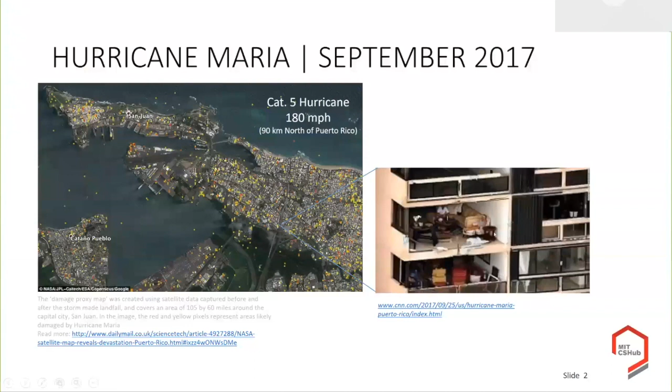To start with, we have seen it all coming over and over again. Hurricane Maria, September 2017, Category 5 hurricane. Puerto Rico has still not recovered from it. You see here a map of damage that occurred in San Juan. The local damage also here. Still, Puerto Rico has not recovered.

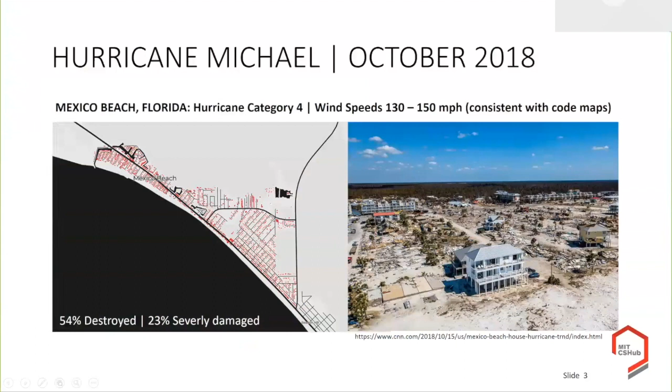You have all seen and heard the story of Hurricane Michael, devastating Mexico Beach, Florida, a hurricane Category 4 with wind speeds of 130 to 150 miles per hour, as predicted by current code maps. Still, despite that fact, 54% of all the buildings have been destroyed, 23% severely damaged, except for one building, as you see here, which apparently had not much damage.

Impact of hurricane damage, wind and floods are huge. Hurricane Harvey alone had an estimated cost of $125 billion, second only to Hurricane Katrina. The top vulnerable states or areas are New York in first place at $2.92 trillion, Florida, Texas, Massachusetts, where I'm talking from, and New Jersey. If we just take 2017, the cumulative cost of the 16 separate billion-dollar weather events that year was $306.2 billion. These are numbers which are unimaginable and cost enormous money to all of us.

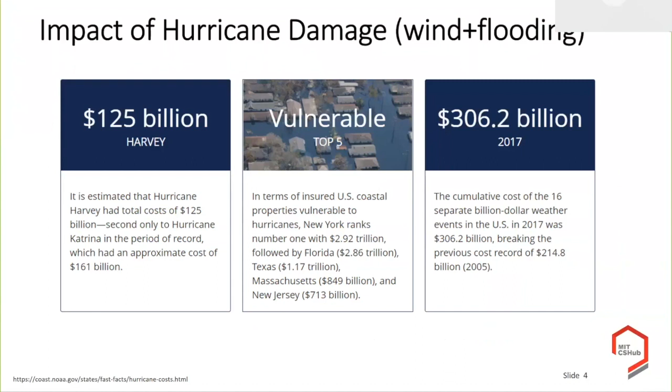So will this get any better? Well, future hurricane damage is expected to increase because of warmer climate, particularly for strong hurricanes, Category 4 and 5. Maybe the wind maps will need to be adapted for it, but it is clear that we need to do something now in order to address this issue.

And have we not seen enough so far to realize that we need to do something? Let me be clear about one thing from the onset: this is not about whether you believe in climate change or not. It's not a matter of belief. This is about whether you do something now or not. And that is a key point I would like to make. This is not about believing in climate change. This is about doing something.

The second point is more professional. I'm a structural engineer by training, and I'm realizing that classical engineering approaches somehow fail to predict this damage, despite the fact that we have the right hurricane speed maps for which buildings should be designed.

So my conjecture here is that classical engineering approaches, which are based on what's called mean field theories, from city scale to structural resilience scale, fail to capture the key nature of hazard events. I will dive into this a little bit more during the next 45 minutes.

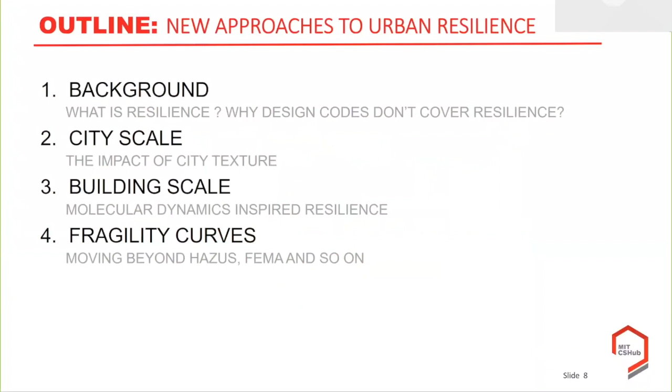I will start briefly with a background. What is actually resilience and why design codes don't cover resilience currently, at least in terms of impact. I then start at the city scale and look at the impact of city texture before going to the building scale and talking about mobility curves, fragility curves, which are used in order to define, assess, and eventually improve resilience of building stock in communities.

So what is resilience? Well, resilience is very often misunderstood as robustness. A structure which is sufficiently robust should withstand whatever type of storm comes in its way. That may be true, but that's not what resilience is about. Resilience actually is shown here on the left side of the slide in this figure. A system is given a certain functionality. At an extreme event, there's a drop of functionality and then a recovery time.

So resilience actually is the combination of robustness, so the drop. If the structure is completely destroyed, of course, you have a rebuilding that needs to take place. But what really makes a community resilient is the rapidity of bringing a system after such an event back to its initial performance.

And in the context of urban resilience, this involves a multi-scale approach. We need to look at the loads at the city scale, and here I'm going to address the role of city texture on building pressure particularly. We need to consider the fragility curves for different building types and loads, so going beyond what is currently in the books in design codes or other types of approaches, and highlight the value of materials like concrete or other strong materials that are able to contribute to resilience.

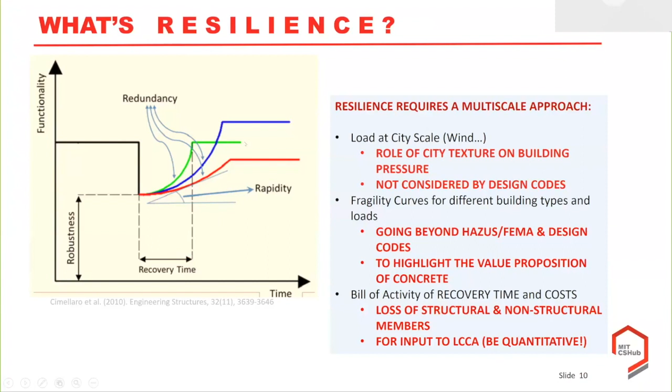Finally, resilience in the end needs to be brought in the context of what is the return on investment, by which I mean we need to bring together the failure at a certain time with the recovery time, which relates to the bill of activity in order to bring a system back to its initial performance. So be quantitative from a life cycle cost analysis point of view.

In fact, I won't show many equations, and don't be scared about this triple convolution integral here. All it tells us is what the key players are that make a community resilient or not from an assessment point of view. On the one side there's the hazard itself. The hazard has a certain uncertainty. How often does it occur? What is the likelihood of it occurring? That is an important issue. But one aspect which has always been forgotten is that this is also city texture dependent, and I'm going to show you this in a little while.

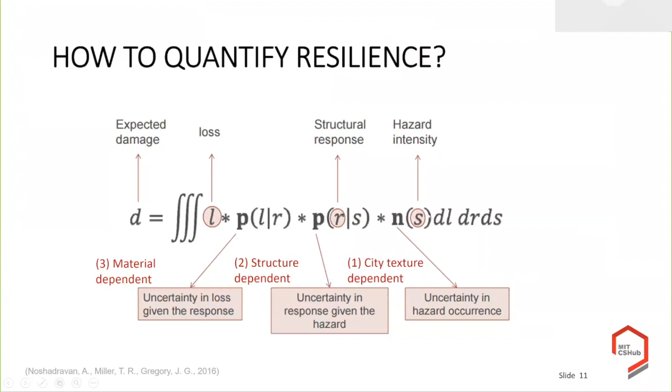The second one is, once we have a given hazard, there is a certain uncertainty, a probability actually, of the response of a structure. How will a structure respond to it? Not on average, but when something breaks, it relates to fluctuations, because structures are designed on average to withstand something. So it's a structural response. And finally, there is the uncertainty or probability related to the loss given this response, which is material dependent. Those three parts need to be addressed and motivate this multi-scale approach, which I would like to show you.

So my first point is the impact of city texture on resilience. The key message I want you to take away here is that urban geometry magnifies or reduces wind loads. City texture densities are already well known to impact the pressure loads. If you look at the different categories of hurricanes that may occur, if you had just a single building, then we could design all buildings as if they were standing all alone. However, there are interactions between buildings and magnifications of speeds and thus pressure due to city texture.

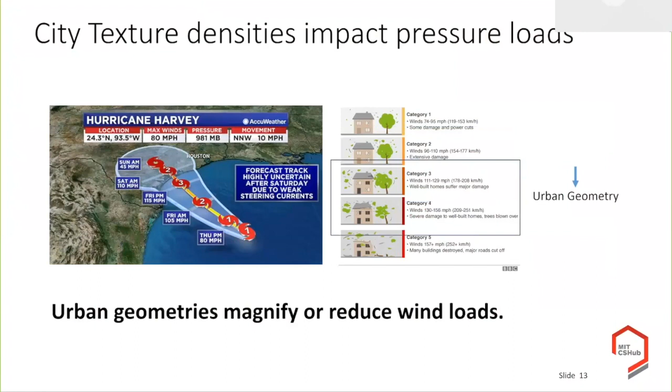To illustrate this, you see particularly that as you go to higher wind speeds, urban geometry comes into play. Now, what is the link between the pressure for which we design a building, the wind loads, and the wind speed maps, which are well established and quite accurate in terms of occurrence? What's the link in between? Well, we have the wind speed from a map which is in design codes or design guidelines.

We have a density here of the air, and then we have this famous drag coefficient CD here for buildings and building types. There's also a surface exposure coefficient, whether you're on the front, on the back, etc. But in fact, what engineers use in design is not directly the wind speed, but the pressure, in order to design a structure for a certain load induced by some wind.

So given the observable damage each hurricane season, what's wrong then in our approach that we are not able to capture these extreme pressures which lead to this strong destruction which we see every hurricane season? So is it the maximum wind speed? Well, if you survey the wind speeds of the different hurricanes, they are well in the range of values which are predicted for a long time. So the wind speeds per se are not the cause that we have a wrong estimate of the pressures which are there.

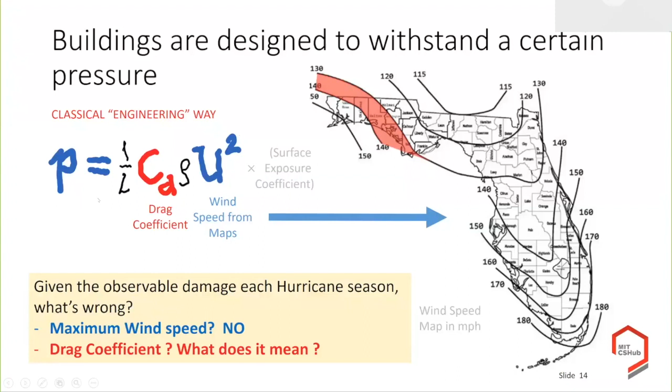So what it comes down to is then this multiplication factor, this drag coefficient, which amplifies the wind speed to the power 2, in translating it into a pressure for which a building is designed. So what does it mean, this drag coefficient? And allow me here to make a simple thought model using kinetic theory of gases. You may remember that equation, the first one here, from your high school classes. One of the most famous ones of kinetic theory of gases.

Basically, you have a box of a volume V. There's a link between a pressure, the temperature, and what is called the kinetic energy. In fact, if you know the temperature, you know the volume, you know the number of particles, you know what the pressure is. So that's classical kinetic theory of gases. However, if you then write this pressure and apply it to our situation, you find that the pressure relates to the mean square speed, which means it is the product of the velocity with the velocity.

So for those of you who remember that from the introductory classes to statistics, that's basically a quantity which expresses fluctuation. Mean squared speed expresses fluctuations. In fact, if we were to take away the mean value, to the power 2, we would have the definition of variance, so the standard deviation to the power 2.

If we take in addition this classical fluid mechanics definition, then you realize that this drag coefficient is multiplied by a factor, nothing else but an expression of fluctuations over the square mean speed, with fluctuations expressing the variability of the speed related to texture. So even for gases, even if I'm not talking about any city, a drag coefficient carries all the information about local velocity distributions compared to the mean speed. Mean speed in our application is the speed defining the design from the maps in design codes.

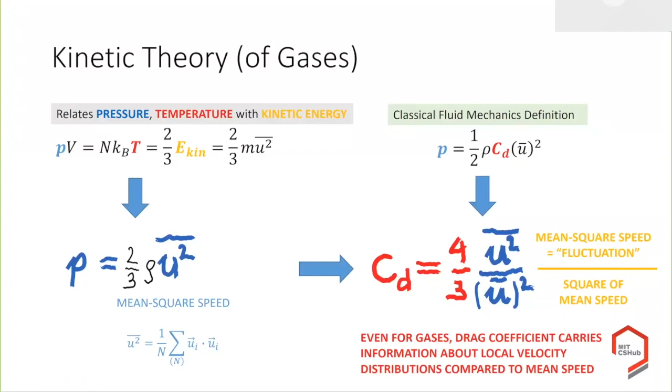So let me show you this as a concrete application. This is October 10th. Hurricane Michael makes landfall in Florida. It was a Category 4 hurricane, speed 130, 156 miles per hour. Exactly what we saw on the television screens, what was predicted. So it is not the velocity which is wrong. However, we have a pressure load here, which relates to this drag coefficient and the velocity of the hurricane that comes in here.

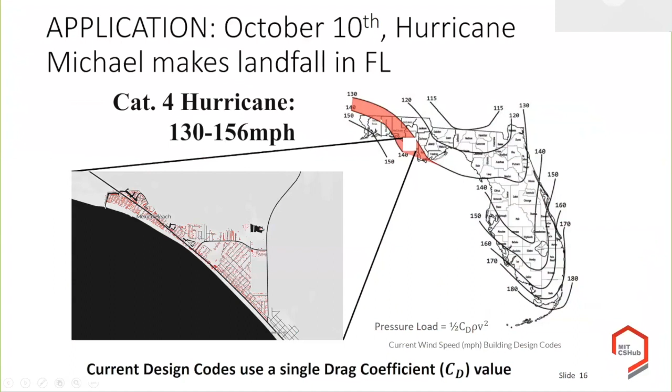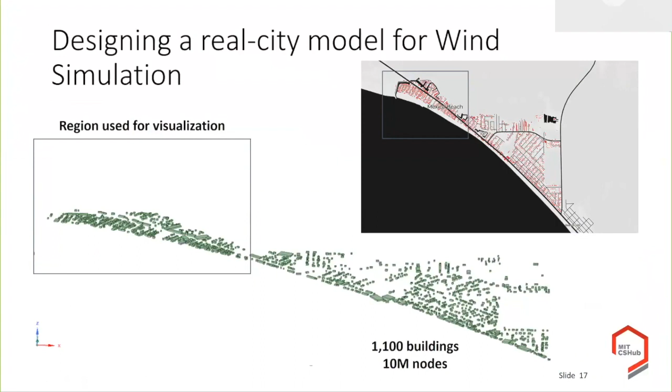So let's make a simulation, a real city model for wind simulations of Mexico Beach, simulating 1,100 buildings by means of computational fluid dynamics, imposing from the seaside a Category 4 hurricane in terms of speed. And I kindly ask you to just look at this map. This is the velocity map resulting from these simulations.

You see from the sea a Category 4 hurricane, so a speed typically, as we said, in the 130 miles per hour range. And then you see in between the buildings, which are in blue, this magnification of the speed due to the urban canyons of the system. So if we were to take for each building the drag coefficient as a constant, we would not capture these magnifications of pressures that result from the urban texture, the way buildings are ordered.

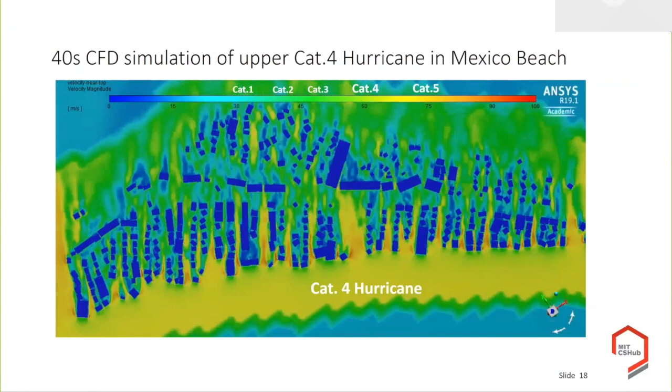In fact, if one looks at the damage map of Mexico Beach, which, as I said, was 54% of buildings destroyed, 23 severely damaged, except for one building here, which I showed you in the beginning. This is from the New York Times.

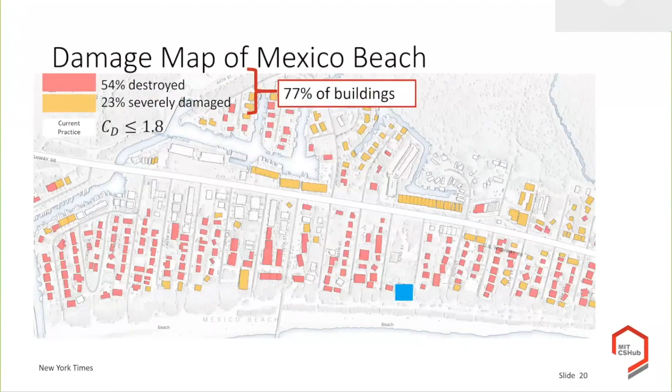And overlay this with the drag coefficient, which we can determine from the simulation, we actually realize then that the current practice is such that 73% of buildings would not be covered, in terms of pressure, by the current design codes, meaning the pressure to which those buildings were subjected is higher than the design pressure as it is currently in application.

In fact, the way of displaying this is to look at the cumulative distribution function of the drag coefficient here, where you see, in essence, here's the drag coefficient for which the buildings are designed, and all this part up here, the buildings which have been subject, because of the texture, to a higher pressure than the design pressure for which the buildings were designed, and that is critical. In other words, there is a distribution of drag coefficient to which buildings are designed, which is currently not part of the practice of designing buildings in communities.

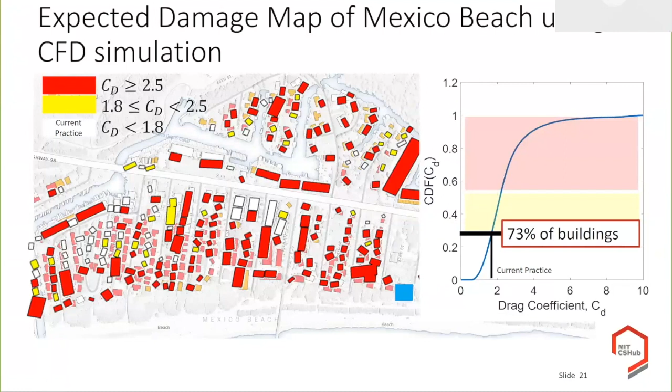So firstly, city texture matters for urban resilience, and current design codes underestimate this amplifying effect of city texture on building design pressure, meaning this is not a matter of changing the wind speed maps. I think they are well established and they have been well studied before. What really matters here, as far as urban resilience is concerned, is to consider and incorporate the city texture drag coefficient into local design codes. This depends on the type of city. This depends on the way how we build our cities.

In fact, one can generalize this approach, since not everybody would like to or has the means of running these computational fluid dynamics calculations for their city. That's the reason why we have developed a city texture methodology, which consists of enriching the geometric representation of the city. A city is not just the building density, but the way how we build entails a variation from that mean building density, which is expressed here by this function g of r, called the pair distribution function. It is the variation of the local density of buildings with regard to the average density of the city.

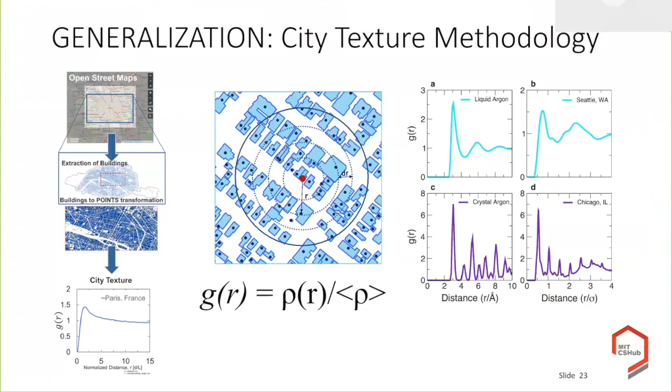And by doing so, one can find out whether a city is crystalline, or whether a city looks more like a liquid. For instance, if you take Paris, it's almost a gas, actually. Seattle is liquid-ish, and Chicago is a very clear crystal structure, basically meaning a repetitive motif in the system. So rather than speaking only about the average density, we enrich the geometric description and see how much that geometric description affects, in this example of hurricanes, the drag coefficient.

So the question which we address here is how much geometric city information is needed to capture a city's response to a specific hazard. We talked about Paris. See San Francisco here, and an interesting feature is if you look at quite a lot of numbers, you see that you have gaseous type cities, Jerusalem, Mexico City. You have liquid type cities where Boston is part of it, and then you're moving towards crystal type cities.

Now, this all comes with another parameter, which is the order parameter: if you have four neighbors, and those four neighbors are exactly spaced by the same angle around you, so basically on a square, then this order parameter would be 1. And it would decrease from 1 to smaller values greater than 0 as we introduce disorder in the system. And there seems to be something built into the structure of cities where this order parameter, this angular distortion, relates to the coordination number. What is the coordination number? It's nothing else but the average number of neighbors which each building has.

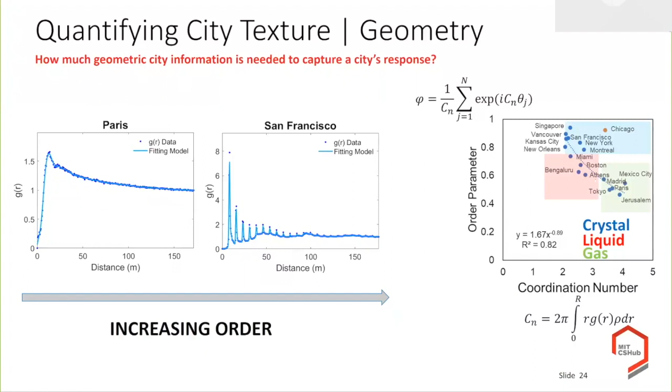So these two parameters suffice to add to the normal building density quantity in order to enrich the geometric description of a city. In fact, let me show you an example.

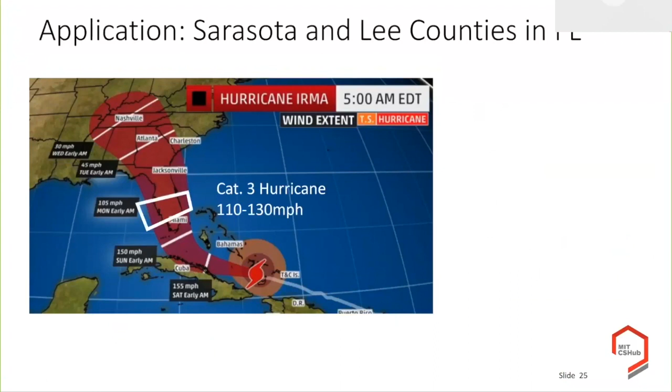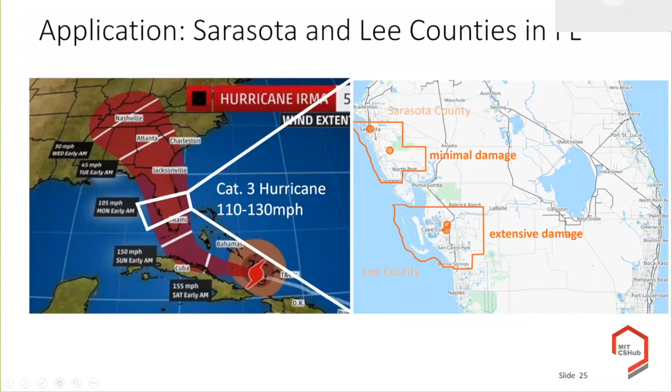This is from Hurricane Irma, a category 3 hurricane. Wind speeds were well predicted, but two areas were subject to completely different levels of damage, despite being subject to the same velocity range, the same speed of the hurricane. Lee County exhibited extensive damage, while Sarasota County had minimal damage. So why was that?

What we did is determine the pair distribution function by looking first at Lee County, where you see this highly ordered structure, a very pronounced crystal structure with clear peaks in the pair distribution function. We compared it with Sarasota County, which even on a map shows higher disorder, much more liquid-ish than the ordered Lee County.

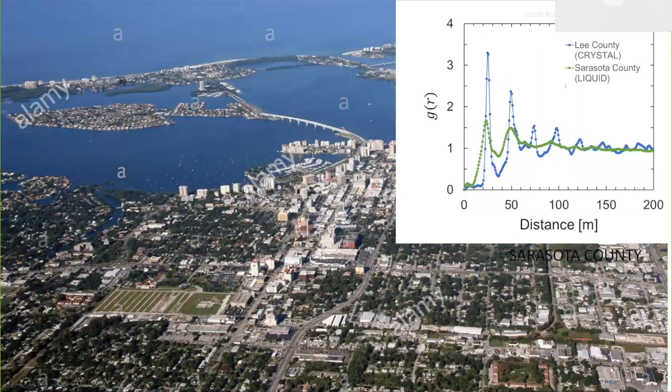So how does that affect the drag coefficient? We ran simulations on the city and found that the drag coefficient, and this is just the average drag coefficient, increases because of the crystalline order of Lee County.

So here is just an example that the damage a community incurs is due to the texture, the way our city is built.

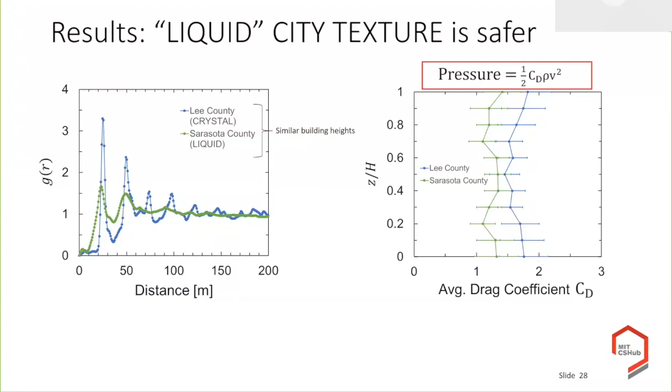Currently we have been extending that approach, looking not only at case studies but running more simulations in order to find out how we could possibly integrate this for all cities worldwide.

What turns out is that the drag coefficient could actually be modeled in terms of two parameters which come from the city texture analysis. One is the coordination number, CN, which we determine from the pair distribution function. The other is this order parameter, phi, an exponent to the ratio between the wall surface of a specific building and the area of the building, meaning the footprint it has on the system.

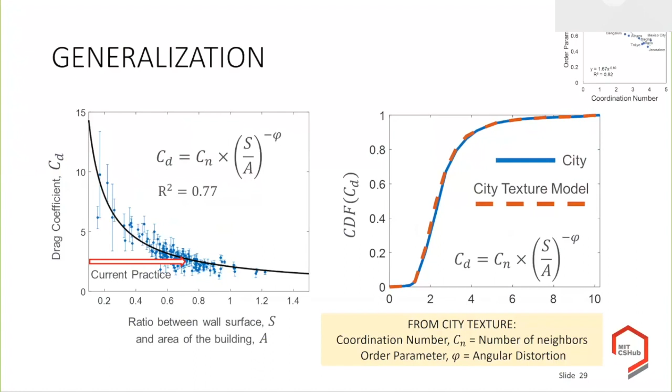In other words, if we have CN and phi determined for a specific city, we can then scale the drag coefficient of a specific building with regard to its wall surface and area, integrate this into the cumulative distribution function of the drag coefficient, and add this into the assessment of the uncertainty of the occurrence of a hazard. Let me now bring this from the city scale to the next scale, the building scale.

Given that the pressures are now known, how do we know which elements break? Is it windows, roof, structural versus non-structural elements? Let me introduce you to fragility curves along that route. The approach we're using here is molecular, inspired by molecular dynamics or molecular simulations, and I hope I'll be able to show you why.

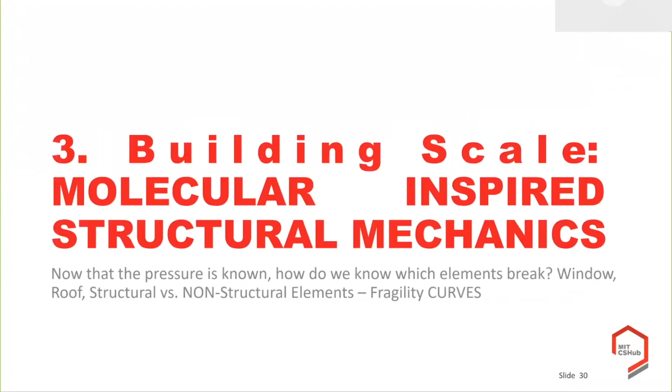So first of all, why are we doing this? Design codes focus on robustness of structural elements, and that's absolutely critical to make sure people escape their buildings unharmed. But they do not focus on non-structural elements.

Here you have this damage in a building in Puerto Rico where you clearly see the structure is still intact, but the windows are gone, so this becomes a non-habitable space, which means it will take time for the community to recover until the windows and other non-structural elements are repaired.

So in the context of resilience, defined as the time it takes to bring a system, after an extreme event that leads to a drop of performance, back to its initial or higher performance, the consideration of these non-structural elements is critical and not currently covered sufficiently by design codes in order to ensure resilience of our communities.

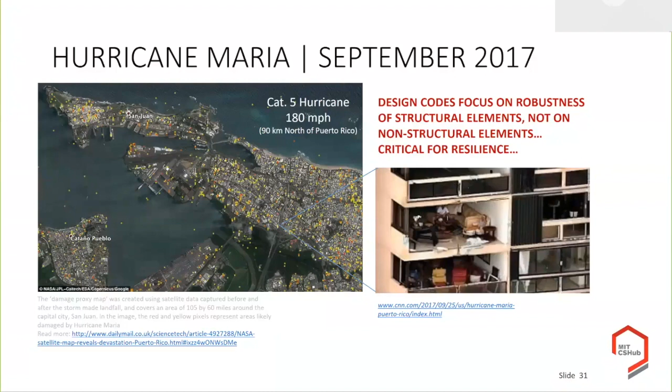So the way we do this is the following: we basically take a structure, discretize it by mass points, and describe the interactions in between. If this was a classical beam, the energy between those mass points is simply given by beam theory. But beyond beam theory, this also allows us to model the breakage of those different bonds.

By doing so, we directly obtain access to the broken elements and thus to the necessary work required to bring the system back to performance. In that approach, we can consider wall elements, beam elements, windows, you name it, whatever we can describe in terms of energy interactions between mass points.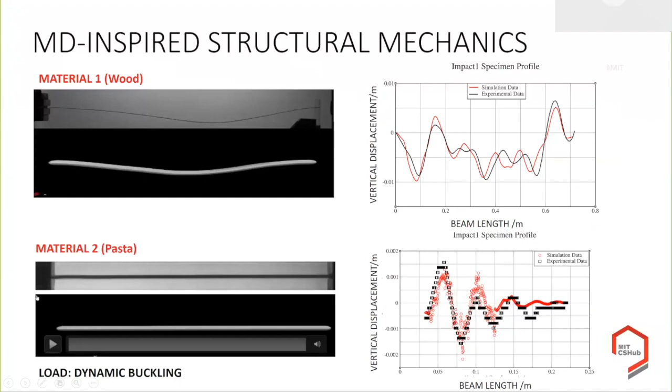Well, not only can we model things like buckling here, but we also can model systems when they fail. So you see the mass coming and the pasta breaks. Similar type of things we can do by simulations here. It's just not at the same magnification level, but you see the same type of damage here.

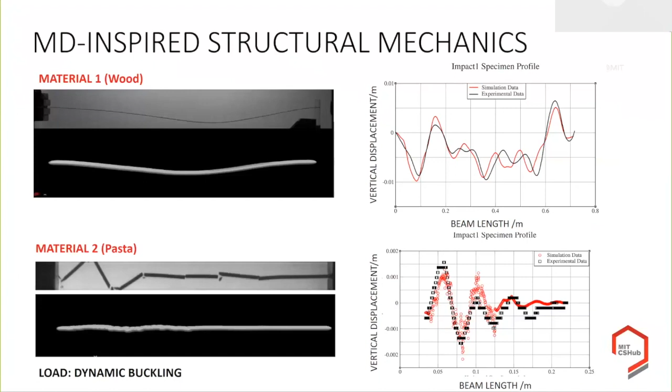If you look at the vertical displacement over the beam length, the simulations capture the experimental observations very well. In other words, this type of approach, which goes beyond continuum theory, which is not able to capture this breakage of the bonds, this molecular-inspired approach can capture it, and by doing so it can be quantitative in terms of the elements that break in a system.

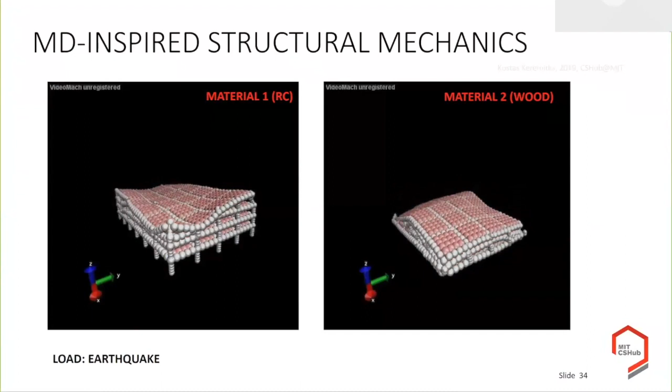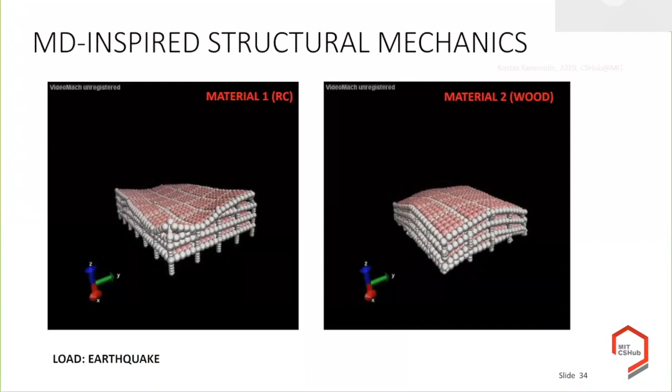It's, of course, not only for pasta here. You see here two structures, one made of reinforced concrete, the other made out of wood, subject to an earthquake. And you see here the complete pancaking, and here a partial one. It was a very severe earthquake, which we considered here. So the approach can handle all types of loads for the system.

Now, let me say what happens when a structure fails. Let me bring it back to the question of why current tools are not sufficient to do this. Let me go back once again to the kinetic theory of gases, the relation between pressure, temperature, and kinetic energy. If you apply such a definition, which works perfectly for gas, that's the temperature you measure in your home right now with the thermostat. If you apply the same definition for structures, you can define something like the kinetic temperature of structures.

This temperature, by analogy to gases, is the kinetic energy of the structure divided by the number of degrees of freedom, which we know of the structure, times the Boltzmann number. This is just a constant number, and then the dimension here. But the most important thing is that it captures the mean square speed fluctuations.

So a structure which is in complete static conditions has a kinetic temperature which is zero. Nothing moves in the system. But when it is subjected, as it is here, to buckling, what you see on the side is this burst of the kinetic temperature when it buckles, and then it slows down because the structure doesn't break. But these curves are extremely important, because they show that the structure does not return to the reference state where nothing moves.

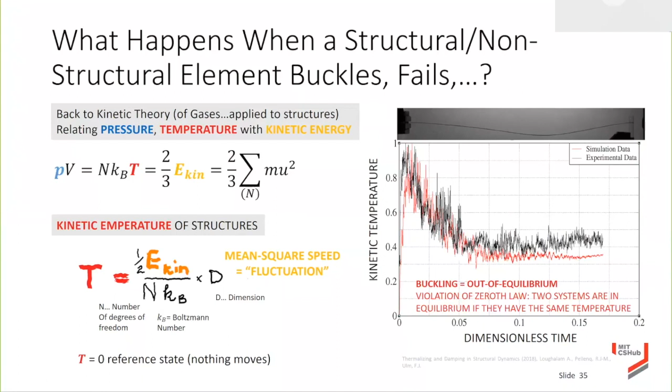So the second lesson learned here is that a structure's fragility relates intimately to bond breakage, and that must be the focus of tools that want to be quantitative at the scale of structures. Classical tools cannot capture this bond breakage. For instance, classical yield design models, plastic hinges, etc., fail to capture these types of things because they have a controlled level of dissipation. They stay in the continuum realm.

What we can do with this MD-inspired approach is to model both structural elements, which are strong bonds, and non-structural elements, which are weak bonds, as long as we can quantify the strength of the bonds between masses. The solution, thus, in order to be quantitative at the scale of structures, is to incorporate bond breakage into the fragility curve assessment. Which brings me to fragility curves, the last point I'd like to address here. Fragility curves express the likelihood of damage, the broken links for a given load, or more specifically, the probability of broken links for a given load.

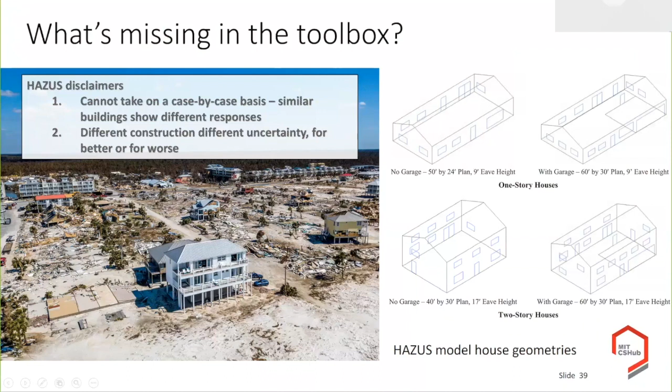In an ideal world, we would see enough structures failing so that we could develop, for each structure, a fragility curve showing the likelihood of damage. Of course, first, we don't want to see so many structures fail. Second, the approach I presented is apt for simulating this in order to determine fragility curves, in contrast to the current toolbox, HAZUS, which cannot take a case-by-case basis. Similar buildings show different responses, different construction, different uncertainty. So it's not specific enough to address the diversity of the building stock in a city and its fragility, the likelihood of failure when subject to extreme events.

The approach we take here is basically a thought experiment, like a radiation approach. Imagine you have an outside source and some structural elements, like a molecular structure, but it could be a beam, or springs between masses. If you want to know the likelihood that one bond breaks compared to another, all you need to do is take out a bond, evaluate the change in energy, and see whether this is the maximum amount of energy the structure releases. That's behind this bond rupture radiation approach, a molecular approach used for many applications.

For instance, the shale gas revolution, which is ongoing, is based on this type of theory, in order to understand whether or not one can recover shale gas from organic-rich shales in different places.

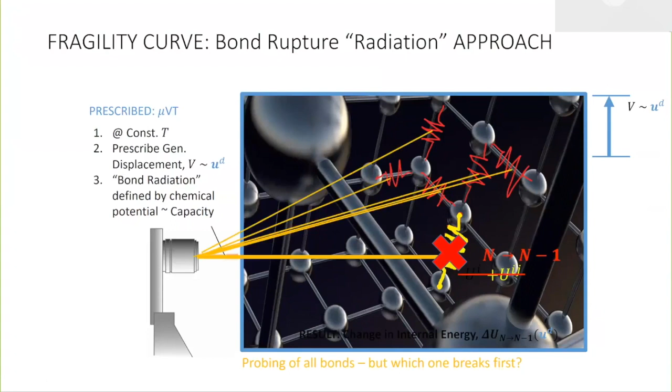So how do we determine fragility curves from this radiation-inspired approach? First, we calculate the damage energy associated with the breakage of those bonds, interpolate damage in between, and define damage states in terms of the percentage of broken bonds we're interested in. By doing so, we obtain the probability of exceeding a certain damage state as a function of load.

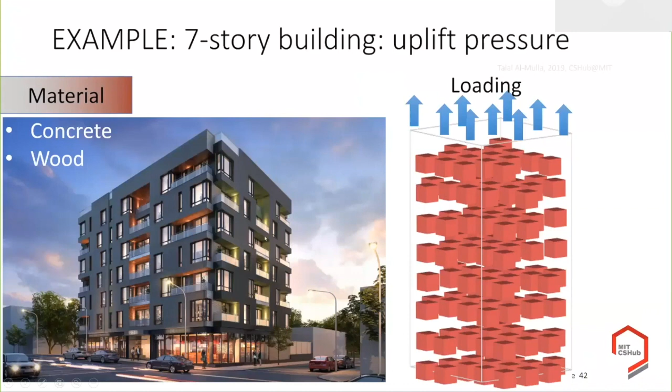Given a certain load, you have a certain probability of exceeding a damage state, meaning a number of broken bonds. In this example, if you take a seven-story building loaded with uplift as a case study, you can obtain building-level fragility curves for different types of materials—materials actually matter here. So given a certain load, let's say 0.2, the probability of exceeding this damage state might be 15%. With a second structure, at the same load, it would be 60%.

This means you can incorporate these fragility curves into the design of structures with regard to the probability of failure. These are related to fluctuations in bond breakage that occur given a certain load to which the structures are subjected. In other words, fragility deals with the probability of broken bonds, and design codes built upon mean field models naturally fail to capture this fragility resulting from those fluctuations, because mean field theories do not capture the fluctuations that occur here.

The solution of the approach we've developed is to incorporate these structural, material fine-tailored fragility curves into the resilience assessment of structures. Let me wrap up here with what's next. My motivation is clear: I want you to join us, with your community, to make your community more resilient to extreme events, be it hurricanes, earthquakes—we're working right now on fire, on flooding, and so on—so that this becomes part of the design practice for engineers.

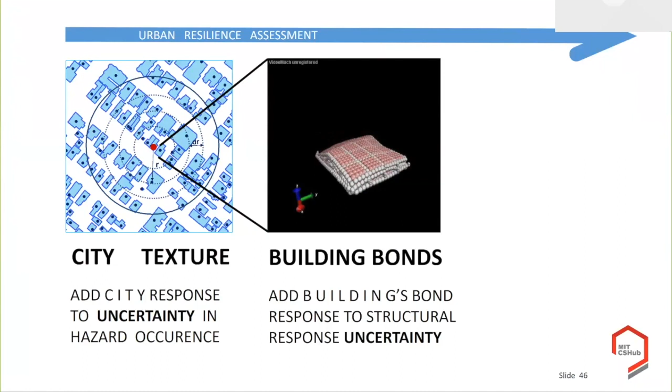Finally, if you would like to know what the fragility curves are in order to assess what amount of elements have been broken in your system in a building, whether these are non-structural or structural members, the approach we developed permits just that here for an urban resilience assessment.

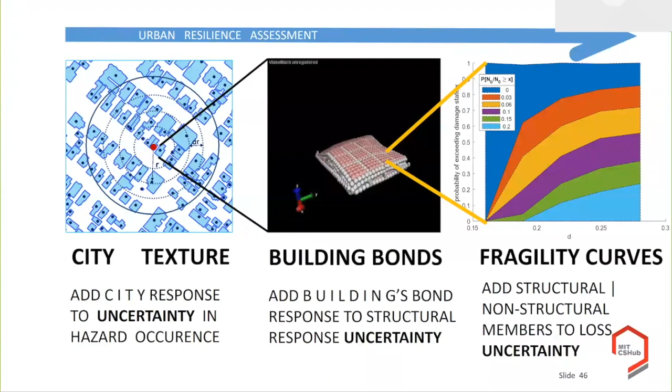However, that would be the assessment. In the end, we need to design to become more resilient. So this actually requires going the inverse route: starting with the fragility curves, and including materials into the resilient design, which right now is not part of the overall picture.

This is an absolute critical step where we can take decisions at a local scale of our buildings. We can then integrate this structural response into structural resilience, considering the architectural design of a specific structure made of a certain material — this response, this number of possible bonds, and the cost to repair them with regard to a given hazard. Finally, we incorporate this information into city texture, as each city requires certain materials and structures. Inversing this approach permits, as we believe, to enhance the urban resilience for all relevant hazards.

With this, I would like to close. I hope I was able to show you that resilience can be done, and it must be done. Thank you very much.

Thanks, that's helpful. I had a question if you could elaborate a bit more on the texture. It's really striking how much that texture affects the pressure distributions that different cities face. But obviously, there's not much we can do about the orientation of buildings in existing cities. So how can we use that information to still support resilient design? Acknowledging we're not going to be able to change the orientation of buildings, nor can we always have that much say when new neighborhoods are created.

Yeah, I think you're absolutely right, we will not rebuild our cities fundamentally. We don't want to erase them and redo them, so absolutely right. But I think this multi-scale approach shows nicely how to go about this. That means if we want to reinforce, we basically want to reinforce these fragility curves of the materials through material choices in the system, in order to see, given that we don't want to change the texture here, that we enhance, in essence, the resilience of the entire community by reinforcing at the building scale.

So these three elements are not independent of each other. If we're not able to change anything at the building scale or the city scale, then we need to go to the component level and reinforce them. So the multi-scale approach shows nicely that there's a propagation from the material to the type of structures to this level. By the way, this is already done in some fields. If you take earthquakes in California, for instance, it was precisely this fragility curve approach which showed that we need to retrofit structures in order to obtain a higher resilience or reduce damage at this point.

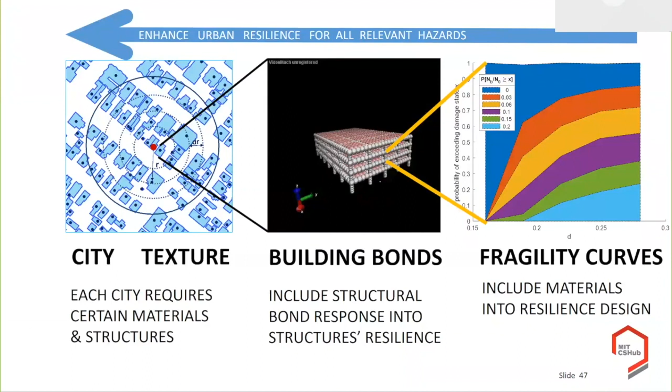And sorry, there's one follow-up question on the fragility curve. It says in the legend, what is NB and what is N0, or N naught, I think is what it is. So N naught is the initial number of bonds, and so this is basically broken bonds over initial number of bonds, right?

So this was the case study of such a simple structure here. But you readily understand that I can do this with much more complicated structures, separating structural elements from non-structural elements. The direct output of the simulations are the broken bonds.

So we count them actually, the broken bonds and the variability, which is the key of it. So it's the fluctuations actually of those broken bonds, that there's not only one single response of a system, but there's a variety of systems mimicking actually the fact that I had a large amount of tests carried out on the same structure. That is the strength of this, it's called Grand Canonical Monte Carlo approach, which we employ for assessment of fragility curves of structures.

Great. As a closing question, a lot of times when it comes to resilience, the solution that a lot of people want to propose after a disaster is to change building codes. And while that's certainly a laudable goal, it can be kind of a time-consuming process that can have sort of variable results. So how do you think that this multi-scale approach that you've discussed could enable maybe a cultural change or just some other ideas about building that wouldn't rely entirely on building codes?

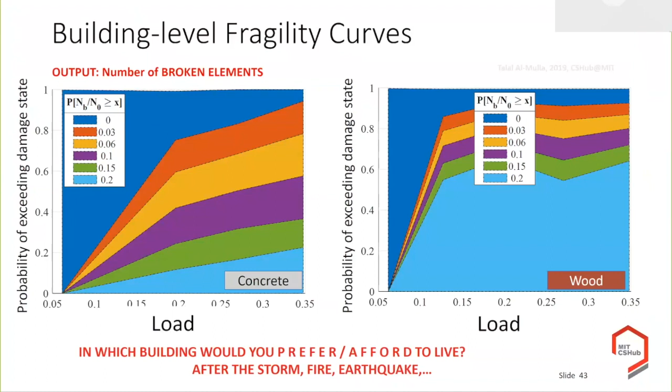These are simple equations, done once and forever, and updated as the building stock evolves in a city. So this can be done relatively easily online without going any further to changing design codes. You don't need to change the design codes for it. What you need is basically a local prescription of magnifying these values. That would be the first one.

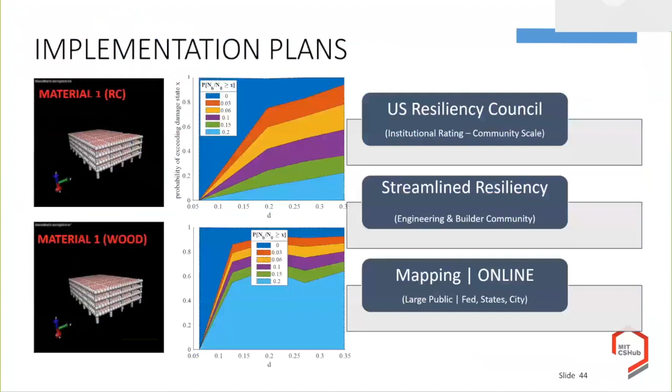Another point is really how you go about connecting with other things. So my first point was this mapping online, large public, federal, state, city scale. A second one is the engineering community. I'm well aware that I, as a structural engineer, wasn't educated with these molecular-based methods. So what we need to bring them into is what is called streamlined resiliency for the engineering and builder community, which is what we tried doing by running these simulations for types of structures like the DOE structures, etc. And only in the case of exceptional structures would we rerun those types of simulations.

So this streamlined resiliency, which is at the building scale, is currently underway, so that we make this available for the community. In fact, for a number of buildings, it's already available. Finally, it comes down in the end to combining the tools which are available: these map solutions, the streamlined engineering community, together with some pressure at an institutional community scale. And there are different organizations who aim at enhancing resilience. One is the U.S. Resiliency Council, which provides institutional rating for communities in terms of resilience. So there are organizations out there who do just this.